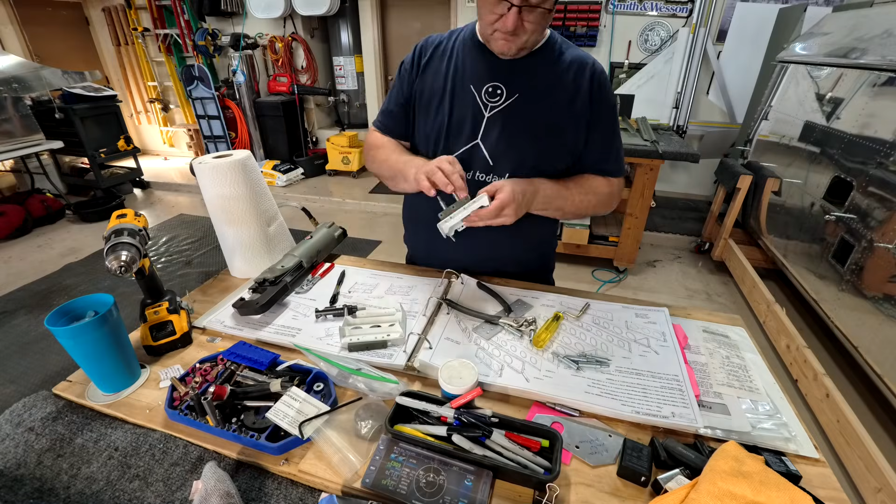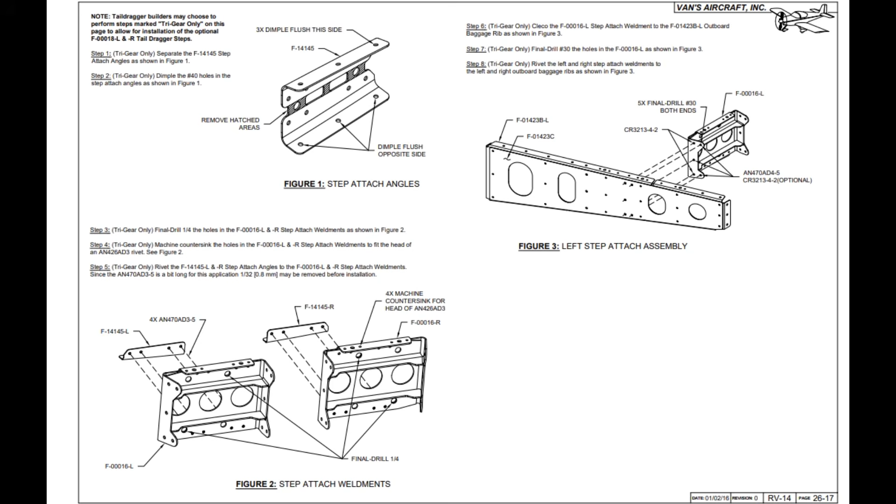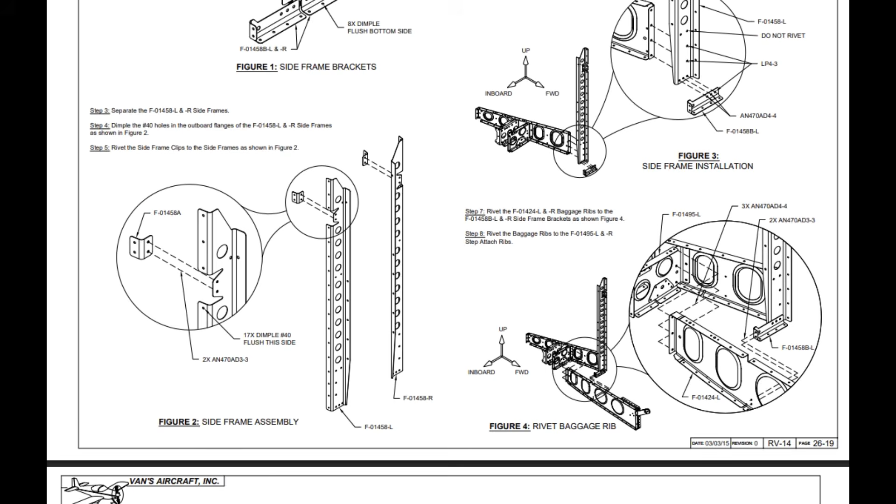You will see the following bits in this video. We work on the step attach weldments - they're powder coated pieces, pretty strong. It holds the step to get up on the wing. We're working on those in this video. Then we do the extra piece that kind of fits in between, and then we end up with the baggage rib and the side frame that your side skin will actually attach to. Those little notched out areas, that's where the longeron fits, just FYI. And then we attach some more ribs in the baggage area to those, the posts that attach the side skin to them. So there you go, that is what we're working on in this video. So have fun.

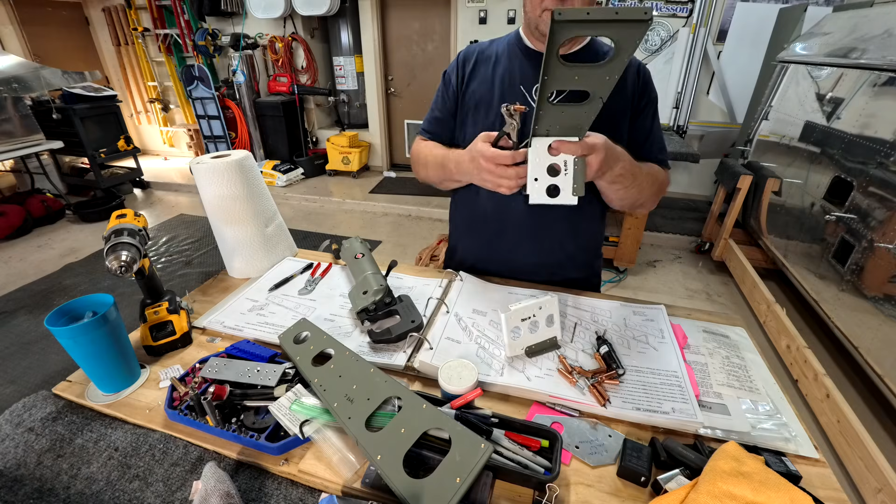So that is what we are doing in this video. You'll see me work on the powder coated steel pieces that attach in between a couple of ribs, and it's where you will attach the step that helps you get up onto the wing.

You can do the rivets with your squeezer, but you're only going to be able to get 2 on each of them. You're gonna have to break out your rivet gun because the space in between the extra metal pieces that make it really strong, the things that form T's, it forms the angle, so it makes it strong. You will have to use a small bucking bar.

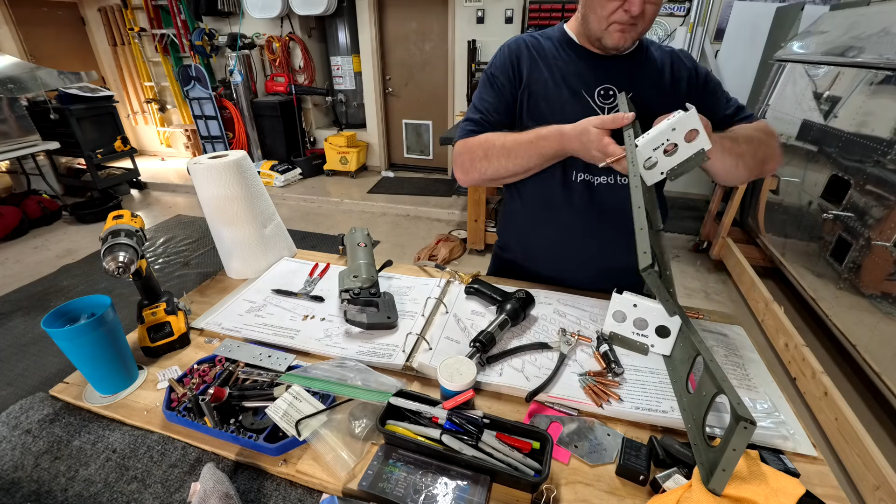I have that BB12, it's fantastic. It fits perfectly in there, and the angle is the same angle that the powder coated piece is from the rib itself, so it works out really nice. I think maybe they designed it that way so it was at that angle - I'm not sure, but it was really nice. It fit in there nice and solid, but you do have to use your rivet gun to get the outside rivets in that particular powder coated piece.

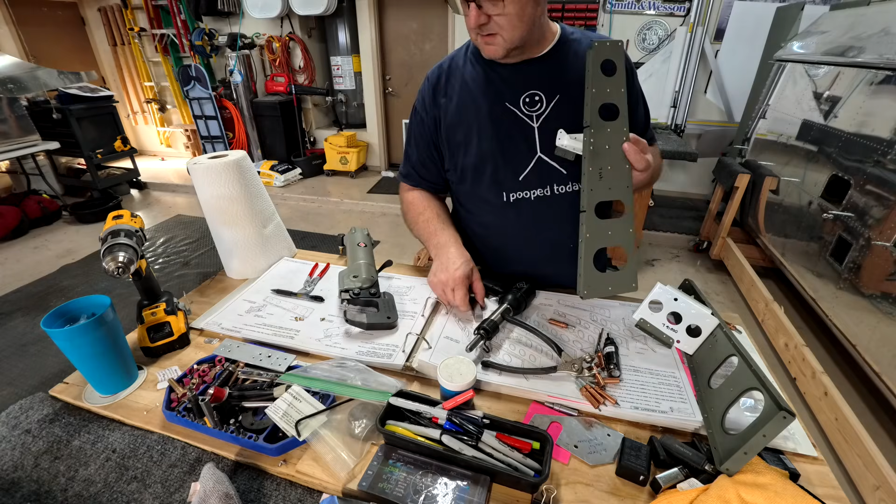So that's not difficult, but you think, oh, using the squeezer, it's pretty easy. And you can get the middle ones with the squeezer. But as you can see here, I just kept the rivet gun and the bucking bar, and there you see me trying with the squeezer again, and you'll see me go back to the rivet gun and the bucking bar because that seems to work easier and better.

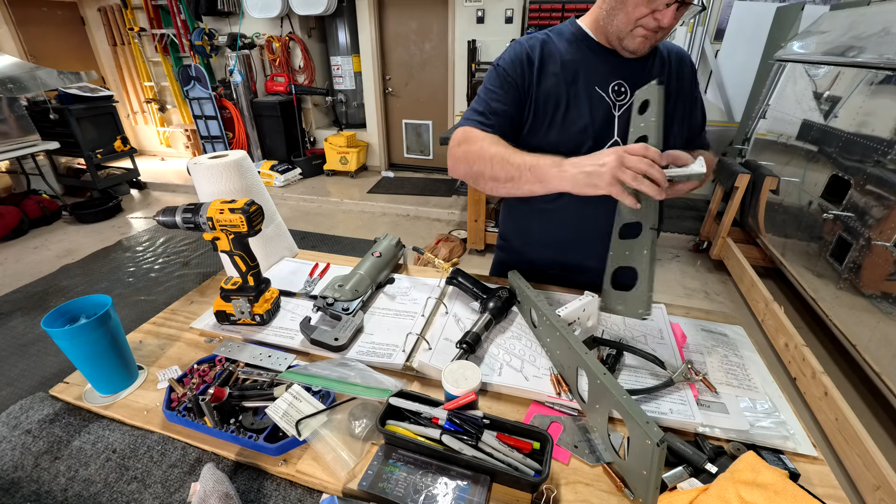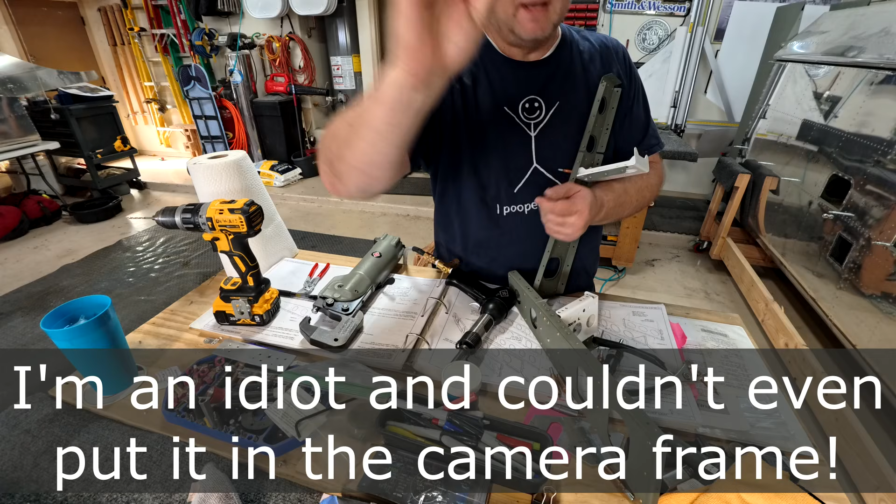See, there I go with the rivet gun and whatnot. So what I'm doing is the angle on this guy is just slightly off, so I'm using my little wedge piece that I've used a few times before, just to pick that bottom up enough so instead of being like that, it's like that, and that's the perfect angle for these guys. So just FYI.

So I do have that little wedge piece, and it worked perfect - it was the right angle and everything, so I taped the little wedge piece onto my bucking bar so it would hold it at the right angle, and I didn't have to mess with it. But you find little tips and tricks like that - it's like, oh, what will work in there? And just do what works.

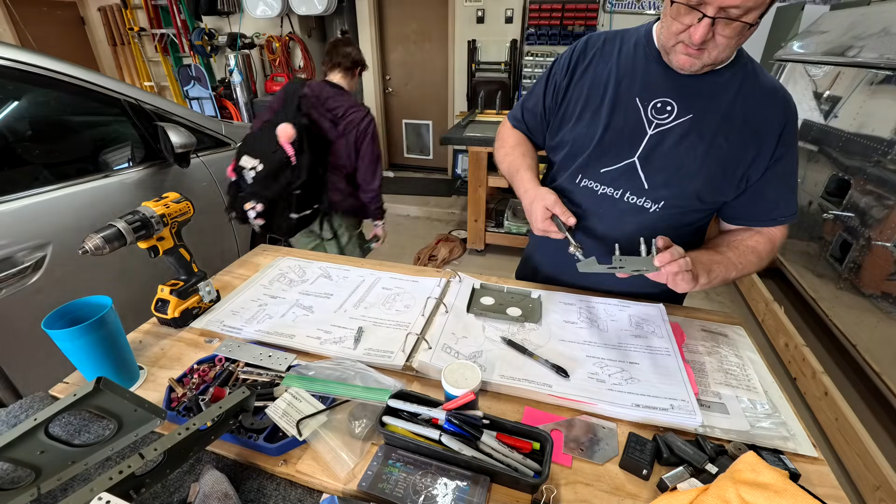And then these are the other pieces that the foot thing will attach to. It's like the other side.

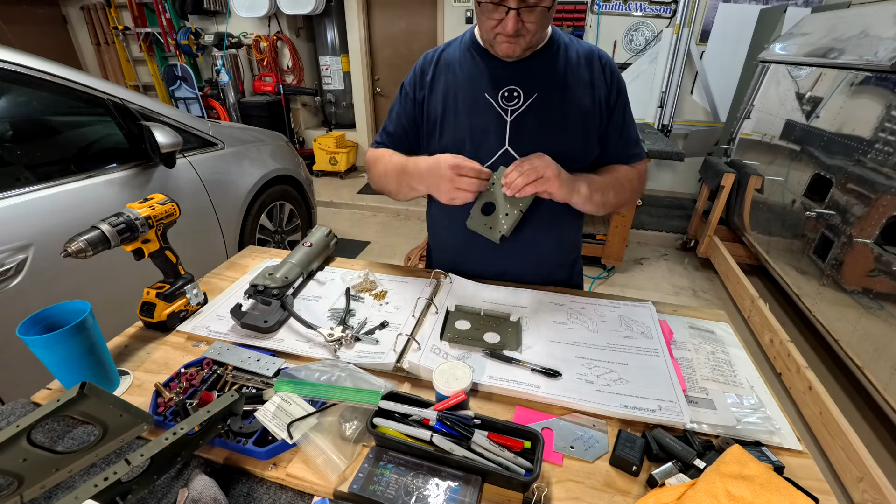You just saw my wife there, and she was talking to me in the video. I cut most of that out because she doesn't like to be in videos, but you got to see her a little bit. Okay, while I have you, I have a couple of jokes, and I hope these are better than the last ones you got.

So we'll see - yes, I think they're hilarious. We'll see, my wife's right here, we'll see if she rolls her eyes at them. Okay, so you know what they say about spies from Antarctica? Yeah, they have a license to chill. My wife is shaking her head. A license to chill. Oh my goodness.

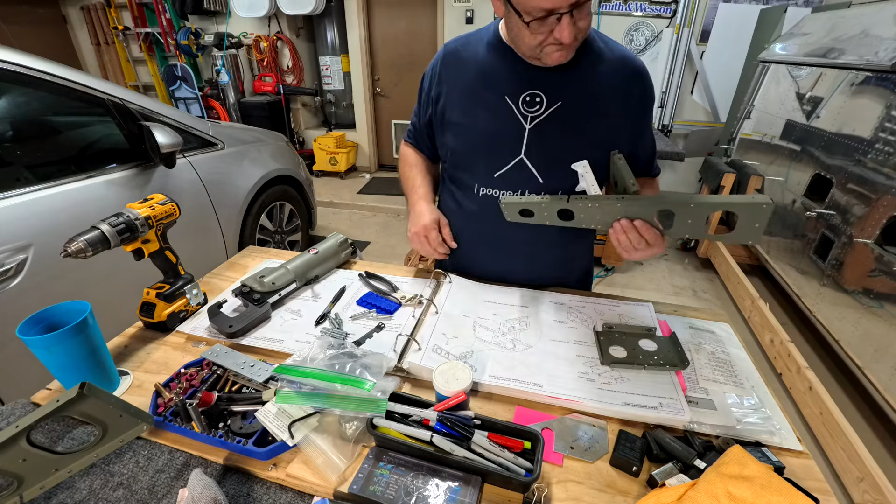So I had somebody ask me this question, and I don't know if this is the right response or not. But do you guys know what genre national anthems are? So let me ask my wife. Do you know what genre national anthems are? Country.

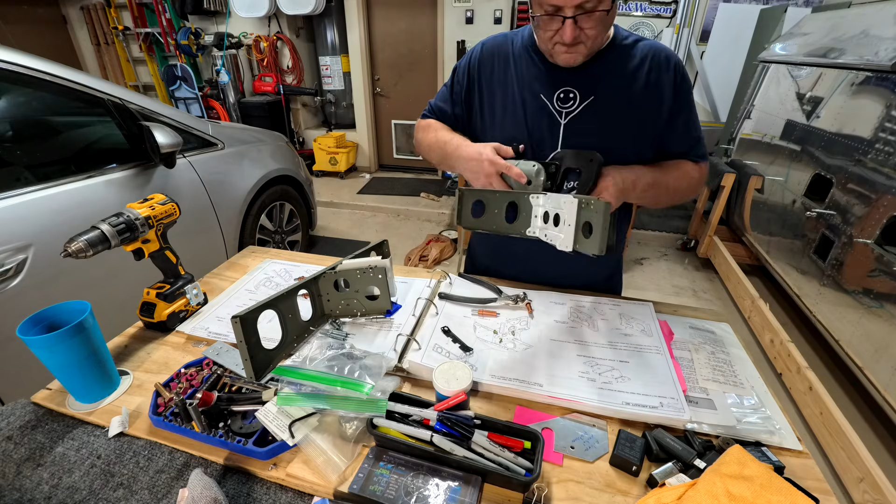Country. National anthems are country. That's perfect, I love that joke. That is a great joke, just so you know. Okay, there's your jokes for the day.

Back to the video here. Basically, you attach the step parts to the rib. The rib will eventually have the little post, stepped forward like 2 or 3 sections. That post is actually what the side skin gets attached to. It's also where the longeron gets attached, in those little notches there - it's the back part where the longeron gets attached. So the longeron goes from the firewall all the way through the side, all the way to the back of the fuselage skin, and the back piece that it fits in is that post standing up right there.

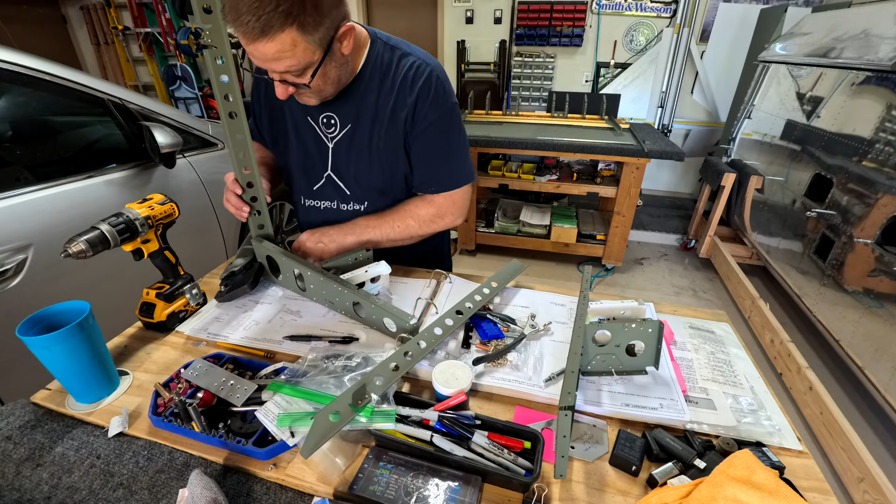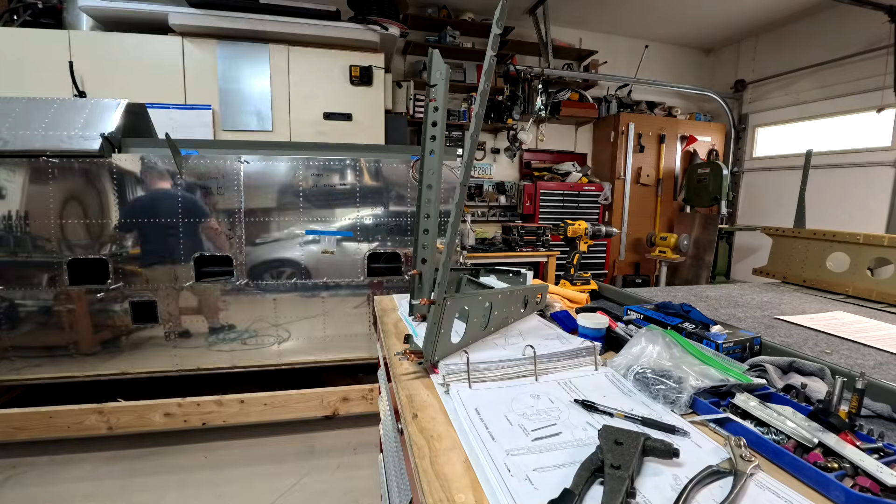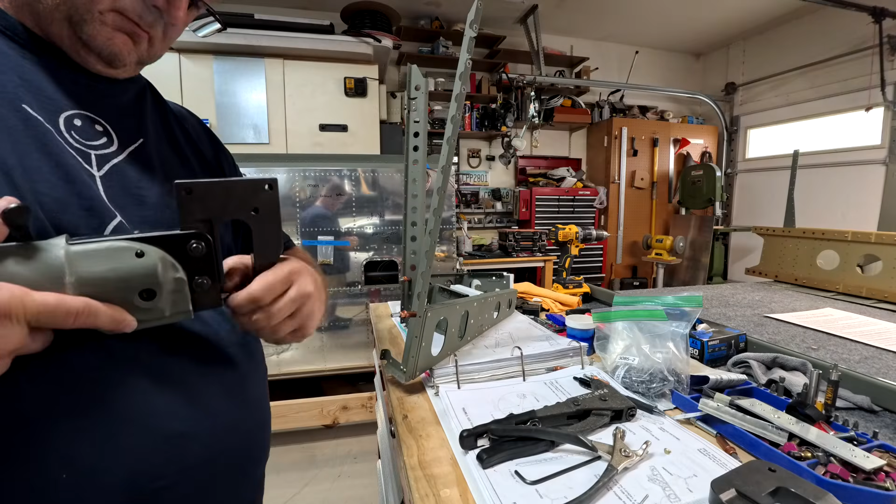Skip forward a little bit, and you can see me attaching it to the side rib. That is the side rib that is actually on, so the skin - it's kind of weird, that one particular piece the skin doesn't get attached to. It kind of floats back there. I think it holds up maybe one of the floor pieces, but the side skin doesn't get attached to it. It gets attached to the posts and the other pieces that you're working on when that side skin gets attached in there.

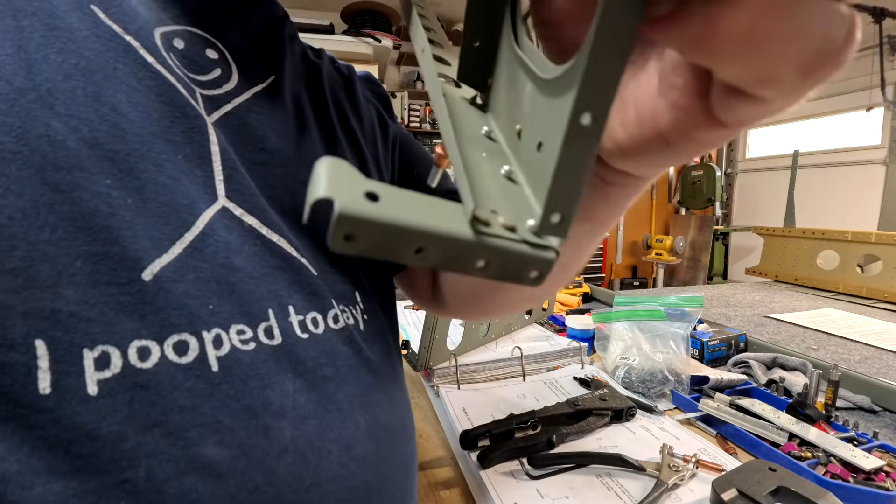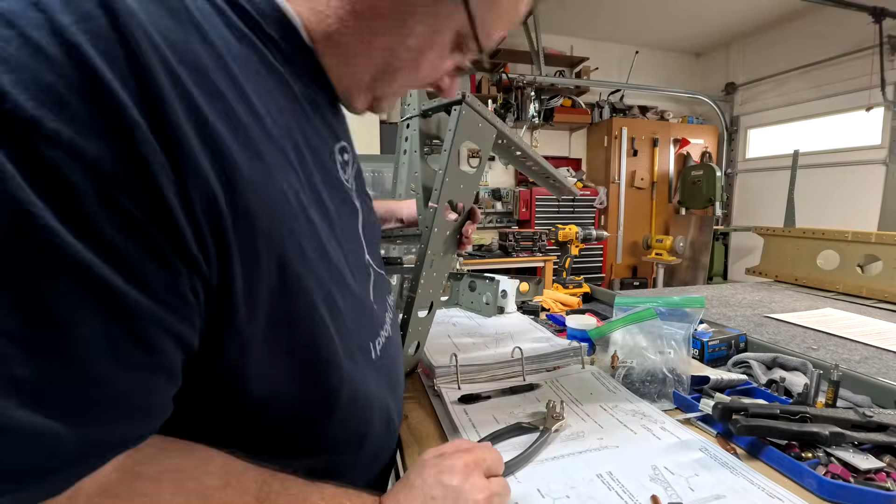I slowed the video down just so you could see - it has some pretty big rivets in there, those are number 4 rivets. There's an extra little piece that is added to the bottom there that fits on your bottom skin, so just be aware of that. And you see the angle it makes - you attach that piece to the rib, and the other thing makes that little angle.

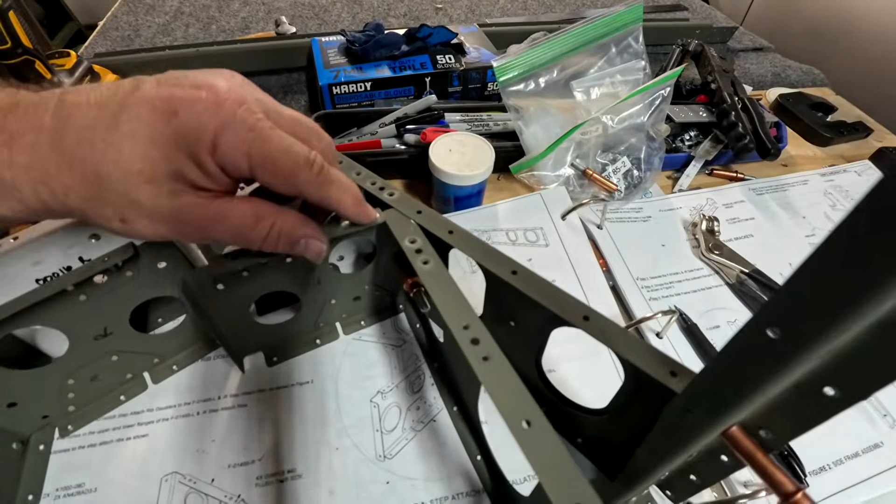Again, I'm just pretending to be an airplane builder, but this just looks weird to me. See how it's underneath there and kind of underneath there, and the bottom does the same thing. It's just kind of odd, so we'll see how it does. Like I was saying, it forms that little angle and the pieces kind of overlap a little bit, and I am not sure why.

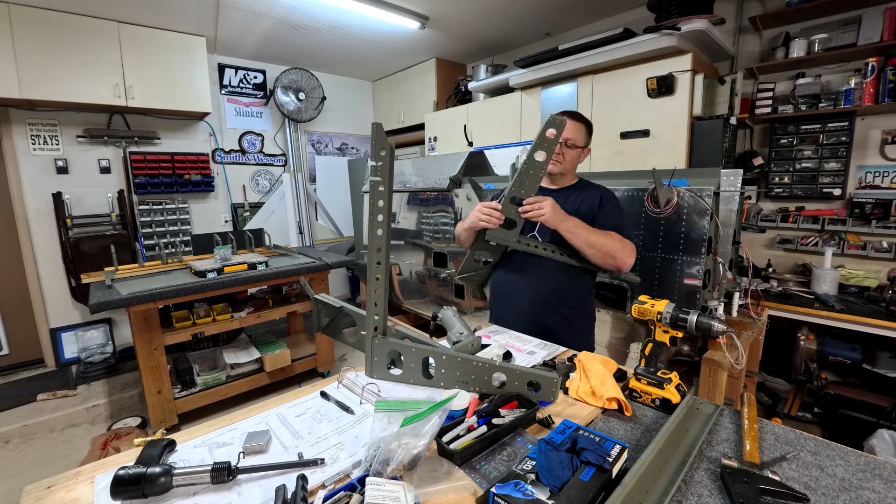I'm not sure if that's the correct way to have it, but it seemed to fit. Nothing really was rubbing, so I'm like okay, and then the instructions said to do it like that, so that's what I did. But if anybody has knowledge on whether or not that piece is supposed to be on top of that other piece, it just seems weird. I know the powder coated piece has the nut plates on it so you can screw the baggage area part down on it. It just seemed really weird to me, so if anybody has further information or knowledge on that, I would appreciate it if you shared it with me.

We're getting really close to the end. I think I add the last rib onto the other side of those pieces here towards the end of this video, and those go on pretty easy - same deal. You'll use your rivet gun, you see me with my long attachment. You will need those, so go buy them - they come in really handy, especially when you have to get around big pieces, so they're kind of nice to have.